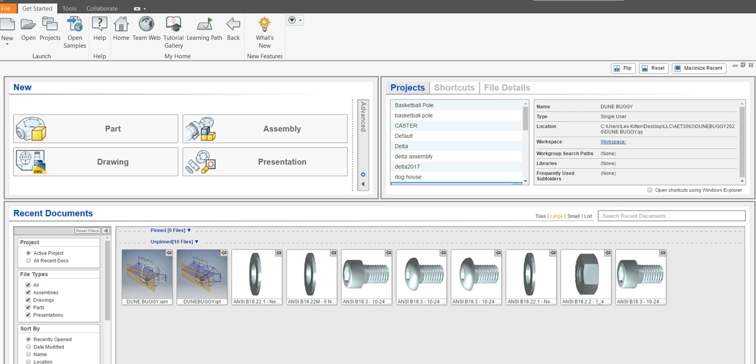Okay, today basically we're going to make a basketball frame and rim. So the frame needs to look like this. I did add a couple things to it since I originally did this drawing. You do need to put a 1/2-inch piece of polycarbonate, smoked polycarbonate, on the front of it like you typically see on a basketball rim.

You do need to put some holes in the bottom plate, 1 inch by 1 inch from the corner, 1 inch diameter, and put 4 bolts in it, so like you'd bolt it to a piece of concrete. Okay, so those are kind of the additions, and they're listed in the instructions.

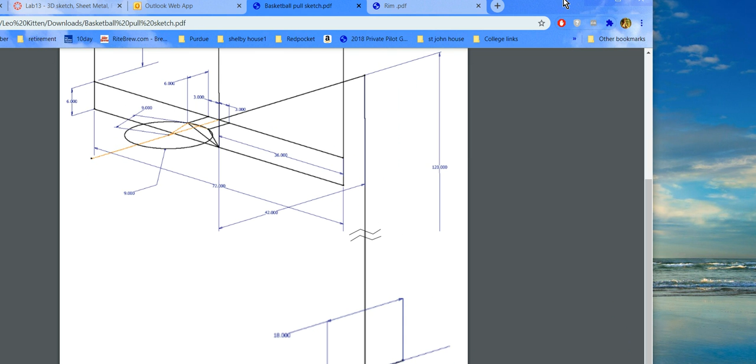Alright, so there's a sketch that basically goes into how to draw this. Okay, so we're going to do it in 3D. It's a little different than what we've seen before probably. Can't hardly see that. Okay, so it's 18 inches long, and we'll be centered on that. The bottom plate is 18 inches long.

Alright, so the first thing we need to do is make a project. So if we go into new from the file menu and pick projects and pick new again. Next, let's call it basketball pole, I guess. Make sure you're saving it wherever you want to save it. Your U drive or

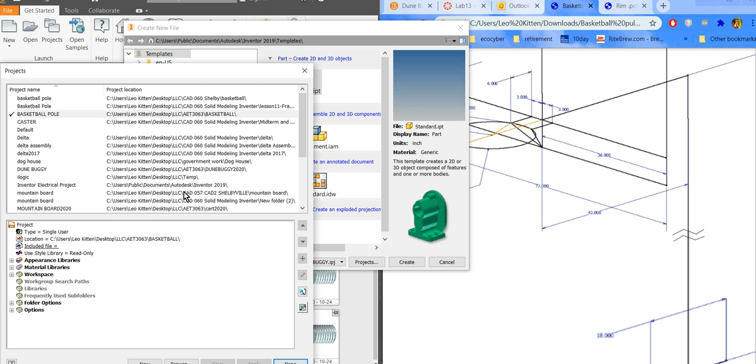Okay, and then finish. Once you pick the folder, finish it. It'll automatically save everything there. Okay, now the next thing we want to do is, we're going to create a standard part with a 3D sketch in it like this, okay? And I think it's all one 3D sketch, so it's definitely a lot simpler than the dune buggy we did. But it'll be some good practice on Inventor.

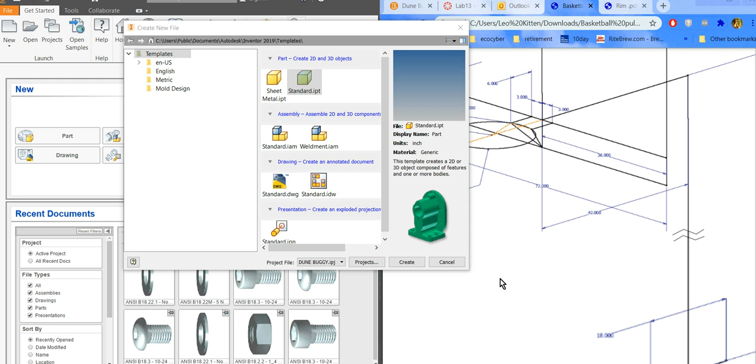And then we want to make sure we put it into a weldment assembly this time, not a standard assembly, okay? So it's a little bit different there. Alright, so go ahead and pick standard part first of all. And we're going to go right into a 3D sketch and basically sketch this whole plot.

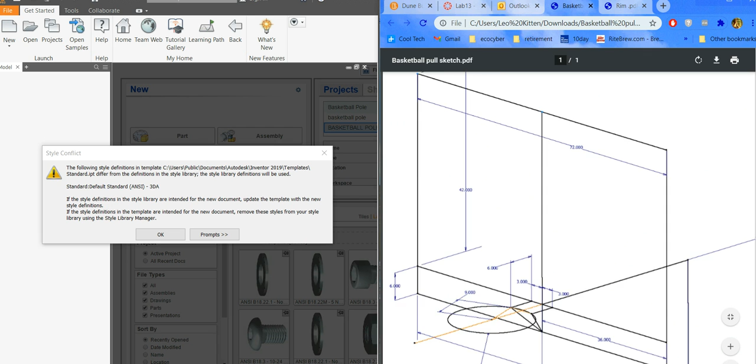Now you got to be really careful that you're going in the correct axis. I know it's kind of hard to see this, but hopefully you can kind of see the outline of all these tubes. I'm going to do it in front of you so we can do it together. Alright, so we start a 3D sketch, okay, and just pick a regular old line, and I'm going to go to more of a top front right view, okay.

Now notice all 3 axes. We're going to start off at the origin, and we're going to go straight back along the, notice the blue Z axis. We're going to go straight back along the Z axis 18 inches. Okay, so I'm moving in the Z direction, and I'm going to type 18 and then enter. Okay, now that gives me an 18-inch long line.

I'm basically going to hit escape to get out of that one, alright, because I want to draw right in the middle of that line, straight up. So I go back and pick line again after I hit escape, and I find the midpoint of that line. There it is right there. Make sure you get on it or it won't be locked down. It's not going to be locked down very well on this one anyway.

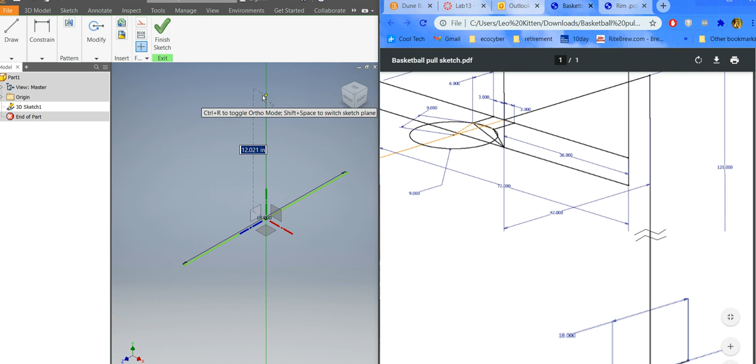And this one, the height is 120, 10-foot tall rim, right? So go straight up from the midpoint of that first line you drew, type in 120. I got off the screen, so I'm going to have to do it again. Straight up 120.

Okay, now it gets a little bit tricky. So we're right here. We're going to go straight out on the rim. It looks like 42 inches. So that would again be in the Z, okay, towards you, 42 inches. Okay, so we're drawing this line right here. All right, now you kind of need to just trace around the backboard.

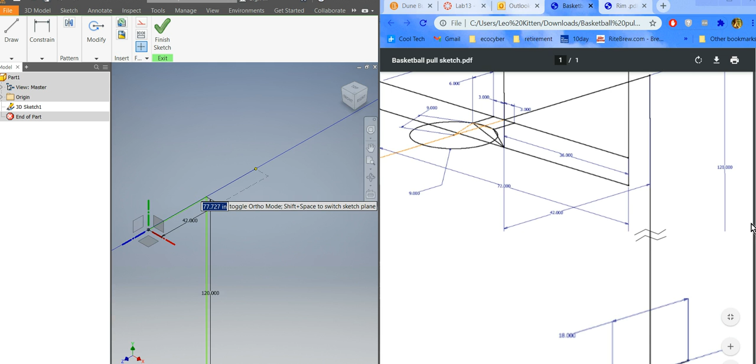So basically we're right here on this point. We're going to go over 36, and we're going to go up 42, back 72, and then back down and close it off. And then we'll just add all these other lines and circles. Okay, so I'm right here at 42 out. I'm going to go back this way at 36, if it'll let me.

I gotta quit switching screens. It always knocks me out of it when I do that. I don't know if I was on it. You gotta be real careful and make sure you actually are on the correct position. It looked like I picked the wrong position there a little bit ago. Knocked it out of whack.

So 36, and then straight up 42. And then straight over on the x-axis 72, and straight down again 42. So we're drawing the backboard at this point, and then back to where we started. Make sure you get on the green dot when you do it.

Okay. Now next one I'd probably do is just draw the bottom part of that backboard. So it drops down 6, goes over 72, and then back up.

So it doesn't matter which side you really start at. I'm starting right here. Go straight down 6, and over 72, and back up 6. So this 3D sketch works really good, especially when you're just doing nice square items like this. Okay.

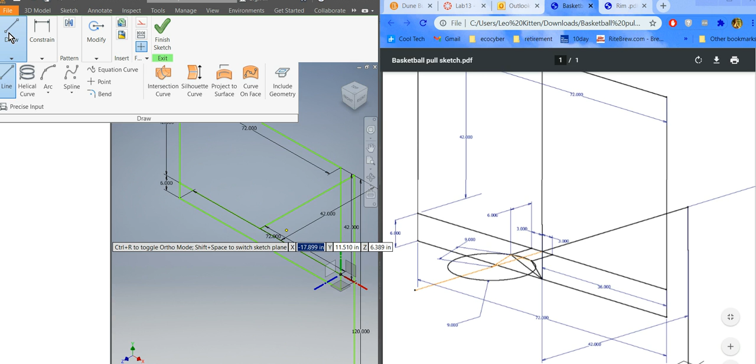There is a bar right in the middle, looks like, so we got to add that stick right in the middle all the way down. I'm going to pick on the midpoint of this one. I'm going to go all the way to the top. Sure I'm in the midpoint of it. Okay. Okay, so this is the basis of the whole basketball pole. It doesn't have the rim.

At this point, it'd probably be a good idea to go ahead and lock all those so they can't move on you, because they're probably going to want to move. So I'm just going to window all them and then lock them, because I know they're all correct. Okay, so I fully locked them down now by using the lock constraint. Okay, so I windowed them all and then hit the lock to lock them down.

Okay, now we got to work on the rim. The rim's a little bit tricky. So the first thing I'm going to do is basically create these braces. Okay, so it looks like they're 3 inches away from the middle. So I'm just going to freehand it in there and then add the 3-inch dimension. Okay. Probably do one thing at a time so it doesn't get completely out of whack.

So draw a line and just make sure you're on this line somewhere. It doesn't matter where. And then the Z again, go out. Looks like it goes out 6. Okay. And I'm going to tell it that that line is 3 inches from this line. Let's see if it'll work. Hopefully. Dimension it from this line to this point. It'll let me. Doesn't want to let me, of course.

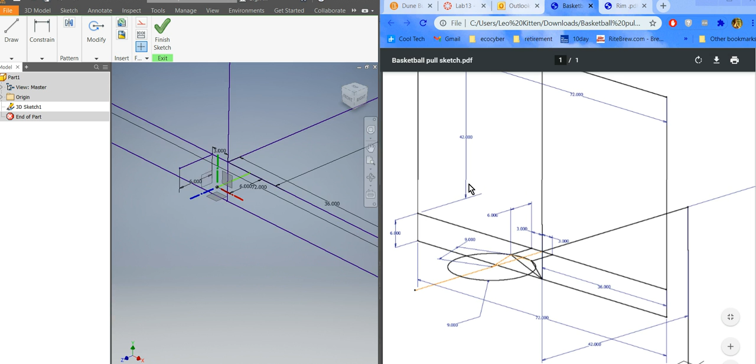Draw a line over there and then dimension it at 3. Make sure it's on that line itself. Go the right direction until it's 6 long. Throw a dimension across there, 3. Point to point. Usually we don't do point to point, but 3D it's making you do it. Okay, those are both locked down, so that's good.

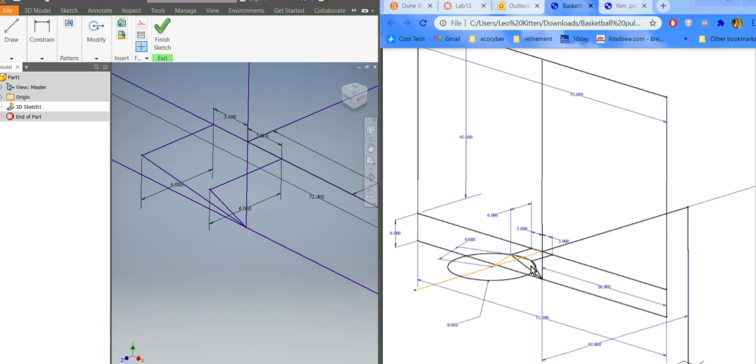Now we want to draw a diagonal down to that base. Okay, so again, draw two lines at a little bit of a diagonal from this one here down to the corner. Another one over here. Right back up to it, I guess. Okay. Now the rim's always difficult.

So I'm going to read the instructions to make sure I don't run into 10,000 kinds of trouble here. Okay, so we're going to have to do all this stuff. So we're going to use arc center point after we do our construction lines. Okay, so the construction lines, it looks like it goes from here out. Total distance, it's got a 9-inch radius. And this goes to the center.

How do I get that drawn to the center? Is there any other dimension I have on there? 9-inch radius on the rim. Okay, there's no line. There is a line across there, a diagonal. Alright, so I'm going to pick line. And I think there's a construction line. Yeah, I'm going to turn the construction line on.

Okay. And I'm going to go basically just a line out here as far as I can. Okay. Or a little bit extra. On construction, yeah. So from the center point here, I'm going to draw this real long one here, just extra long. Okay. Right in the middle. And that'll give me a line, a place to put my center point on. That's the only reason I'm doing that. So it doesn't really have a distance. So I just drew it out there wherever.

Okay. And now I'm going to draw another line from the angle brace point to that line, and I'll tell it that it's 9. Okay. Now basically give me a place to put my circle. So that's just a construction line. So from there to here, I'll snap to it if it lets me and type in 9. And it of course went too far, so I'm going to do undo and do it again. And I'll just tell it 9 after I put it in, maybe. Hopefully that'll work.

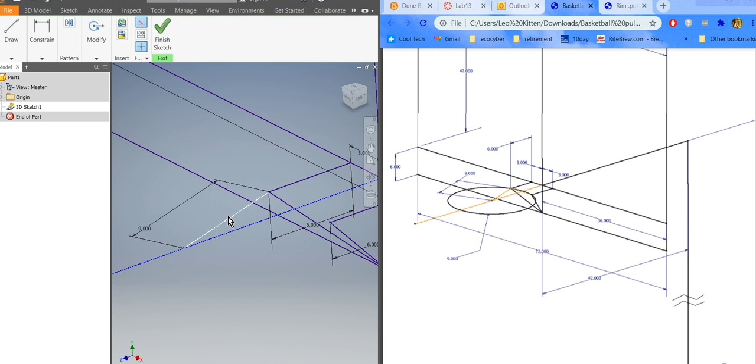Okay, so it says in the instructions, because I had a hard time when I first did this lab trying to get that darn circle to work, but it won't make a tube if it's perfectly round. It has to have a beginning and an end. Okay, so we want to use arc center with the construction lines and dims extended as we need to. All right, so we'll see if we can get that to work.

So draw. There's arc. 3-point, center point. Okay, so I'll pick the center point. Select the center. Alright, there's the center. And there's one point right here, and the other point would be right here. Okay, and now I'll see if I can extend that and later turn it. Yeah, I shouldn't have made a construction line. Go ahead and fix that right now. Touch it and touch the construction line, it goes away.

Now we're going to try to extend it. Hopefully it'll extend, and it's erroring out. Okay, so I probably have to delete a dimension or two for it to extend. Which one does it say? Delete the 6-inch dimension to let it extend, which is kind of crazy, but so I've deleted that, and let's try again. We'll add it back in later.

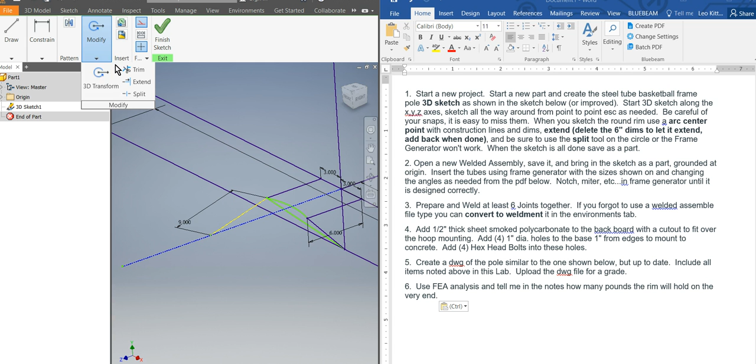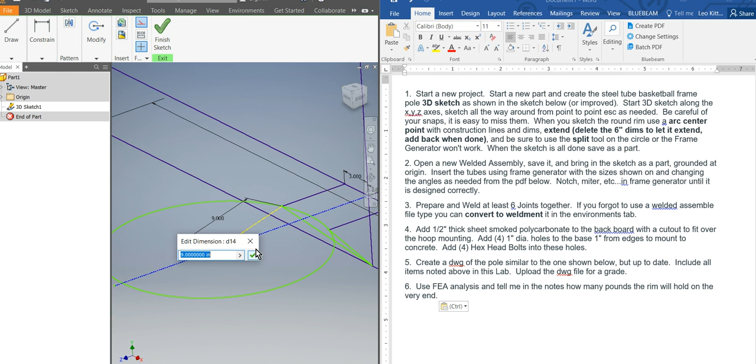Sometimes the programs don't always work. Maybe I have to delete the 9-inch one. Maybe that 3-inch. Yep, that worked. Okay, let me extend it now. I add all those dimensions back in. Looks like everything stayed where it belongs, so that's good. Okay. And I need the 6-inch dimension.

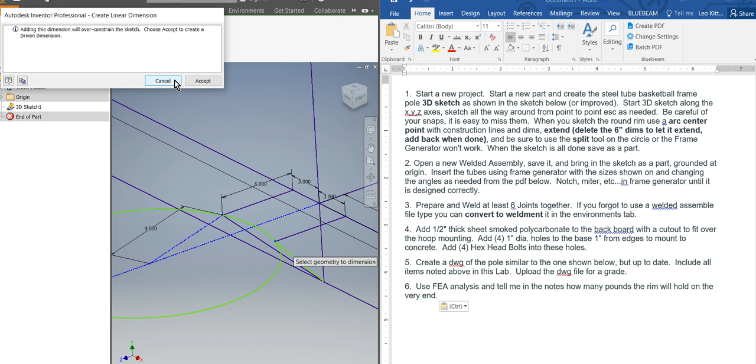Notice it doesn't always work perfect because this thing stayed purple even though I took a 6-inch dimension off of it, which you really wouldn't think it would have, but it did. So the 3D sketch isn't the most... says it doesn't need that one. Okay, so that's fine. Of course this line's not locked down anymore. I don't really know why. It says it can move, but it can't. I'm going to tell it that this line is on the z-axis and see if that does anything. Won't let me do that anyway.

At this point, all the dimensions and everything are right, so I'm going to go ahead and just pick those two and put a lock on them. Hold down the control key to pick more than one at a time. Usually I recommend not doing that, but in 3D sketches you don't have a lot of options. Okay, now it's fully locked. Everything looks right. I've got all my dimensions. I don't see anything sticking out or extended too far or trimmed off, which would be a problem.

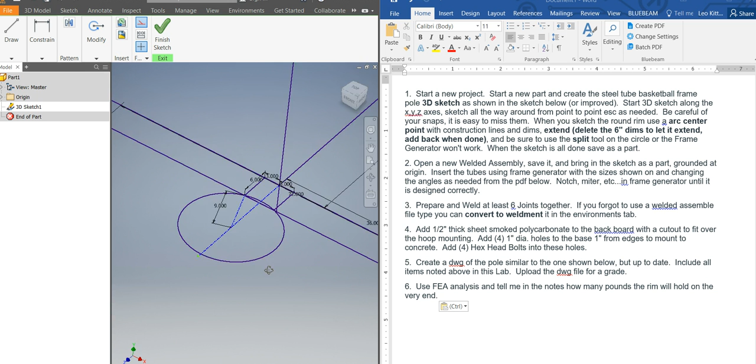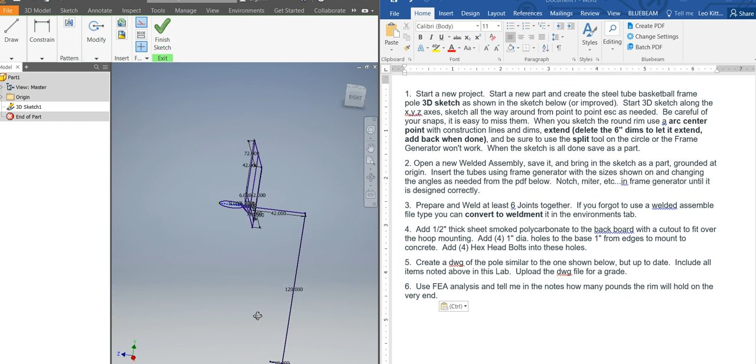Okay. So that's kind of what you're going for. So now you've got a good stick figure of the whole rim. Now this rim isn't like the dune buggy. It's basically going to have multiple kinds of metal in it, as we'll see here in a little bit. And then we'll modify some of the metals too as we go. Pretty simple one. Alright, so save it. Yeah, you gotta finish your sketch first, of course, and then save it. And just call it basketball pole or something like that.

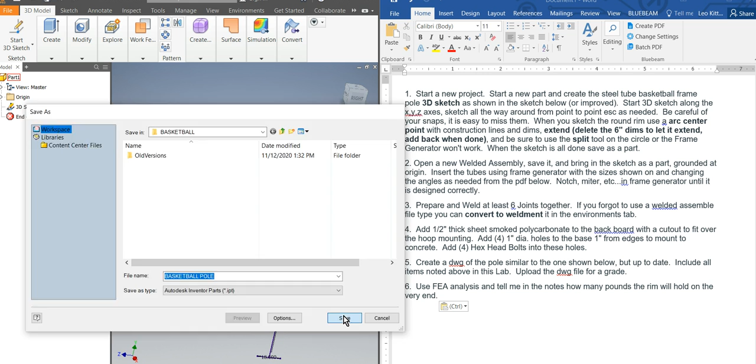Alright, so bring that into your weldment assembly. So file, new. You gotta pick on the first new so you can actually get to see the weldment assembly, and then pick out weldment IAM. Make sure you pick the weldment one. Create. Okay, this is basically the same as a regular one, except you can notice you got a weld tab now with a bunch of things you can do right there. I think everything else is still exactly the same though.

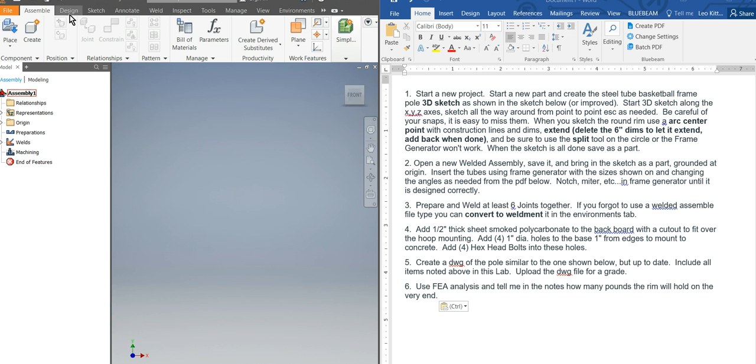Okay, so to begin with, we're going to make all those tubes and all that. So go back to the assembly tab and pick place. Hopefully it'll bring up that. It did. Open it, make sure you right click and drop it at the origin. Place grounded at origin. We just want one of them, of course. Okay, so now I think the rest of it's pretty easy. I think I've got it pretty much memorized.

We're basically going to put all the metal in there, and we'll put some polycarbonate on for the back side of it. Add that in there, and then we'll drill some holes in it. So this should give you some pretty good practice at Inventor. That's part of the other thing, not just the weldment. So it'd be something similar to a slimmed down version of a final project.

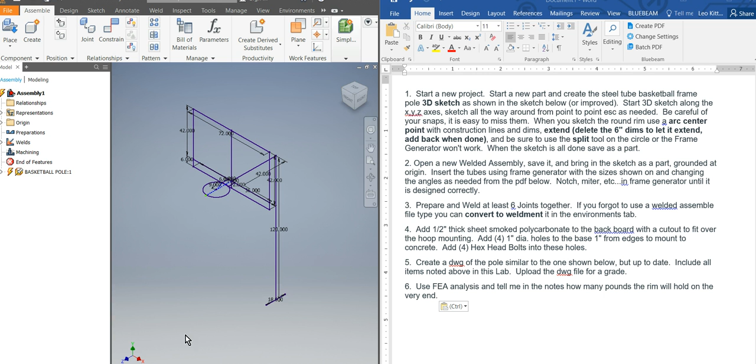Okay, so we've got all that done. Now from here, on the bill of material it's going to tell you what kind of metal to use. So we'll start off with the easy one. Number 12 here says it's basically 12 by 1, 18 inches long. 12 by 1 is a piece of flat bar steel that you just buy from any kind of metal shop. O'Neill Steel or Ryerson, anybody.

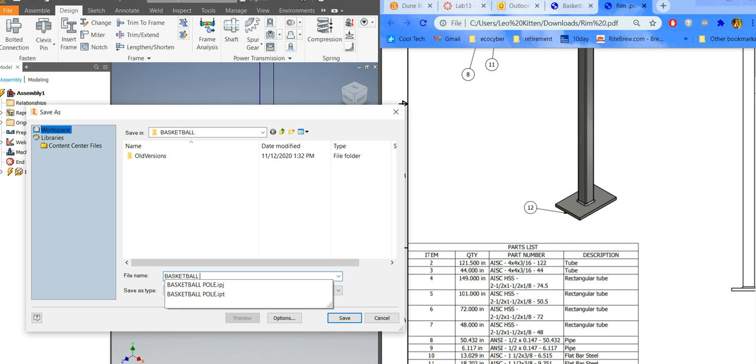So we're going to start off with that one, and we go back to the design tab and pick the insert frame tool button. Okay, it says we need to save it first. Do you want to save it? You bet. Basketball rim all over again, or basketball pole. Okay, once again, insert frame, or maybe it'll bring it up. It did. I think we just pick lines again. You might have to spin it. We'll see how it shows up.

I think it's standard AISC. Family is AISC. Drop it down, and we want flat steel. Rectangular tube. Flat bar steel, third one down. That's square. We don't want square. Top one. First one's rectangular flat bar steel. That is what we want. And then the size, the very biggest one they'll let you put in here is the one we're going to use. There it goes. So scroll all the way down, and 12 by 1.

Which you can buy that, and it's hard to unload though. I actually helped unload some metal that big before at my previous job.

Alright, now pick the 18-inch long one, and lo and behold, it's going the wrong direction. So don't hit OK yet. Now we've got to spin it. Which one of these angles do we use? Probably the only one that says degrees on it, right? Put 90 on there. And pick another bar. There, it went perfect. So it was 90. It is centered on everything, so we don't have to do any of that. This thing is made out of all mild steel, so we don't have to change that. So just hit apply.

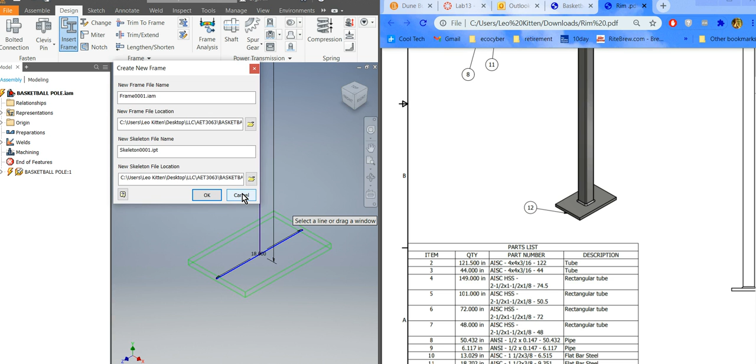I don't think I should have hit apply. Cancel. Do it again. Okay, so pick on there, because we don't want to hit apply till after we pick all of them. Maybe you do have to hit apply since it's different metal. Otherwise, it's going to try to make them all the same. Yeah, we do have to hit apply. It's been a while, right? So hit OK after you hit apply. Alright, so it'll generate that first one. It brings it back up. Now we're ready to do the next one.

So I think all these big ones are 4x4 tubes from memory. Yeah, 4x4 by 3/16. Pretty standard stuff. The two top ones are 4x4 by 3/16. If you work ahead, make sure you miter these with a little gap in it, because you've got to put a groove weld in one of them. So this one would be a true place to put a groove weld.

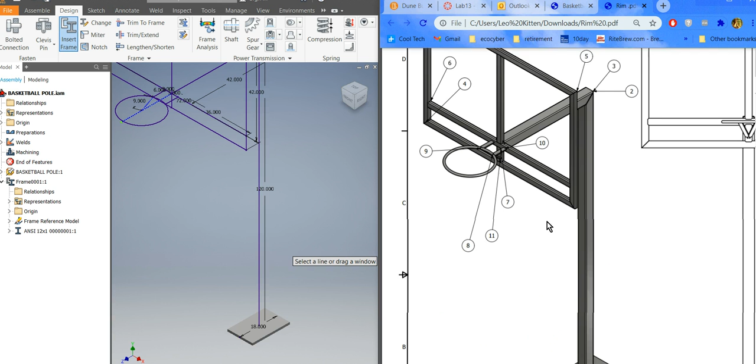All these I think are 1x2s, right? No, they're 2.5 by 1.5 by 1/8. So those are the rectangular ones. And then these little ones are flat iron, 1.5 by 3/8, and the round tube for the rim. I'm trying to memorize all these right now. The pipe is a 1/2-inch pipe, 0.147 wall. Okay, so the first two big ones.

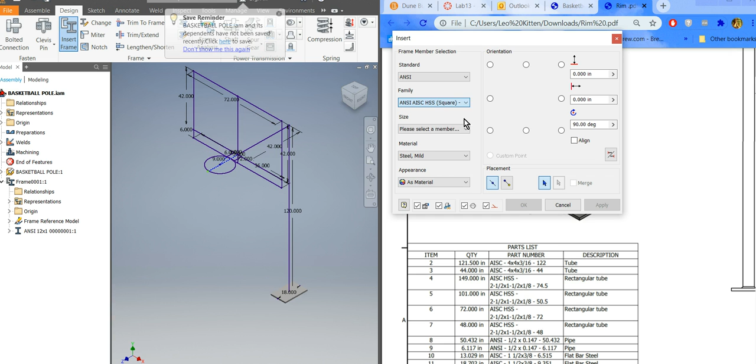We'll pick this one. Oh, we change the metal first. Be a good idea. So drop the ANSI down. Find square tubing, about the 6th one down. And then we want 4x4, 3/16 wall. Scroll down until you find 4x4, 3/16. Pretty heavy basketball rim, 1/8 of an inch probably would have been plenty, but that day I decided it was that.

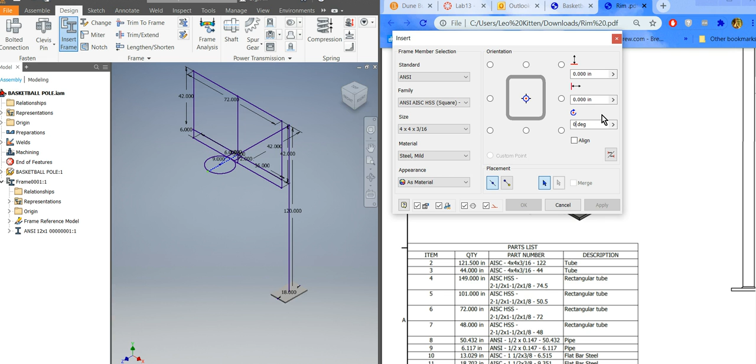I'd go ahead and turn that 90 degrees back to 0 until we need it to be 90. It's square, it really isn't going to make any difference, but get it back to default. So you pick on that tube, pick on this tube. And they look pretty good. Nothing fancy there. Just hit apply and OK.

Okay, so now we're going to do all these. I think they're, what are they? 1.5 by 2.5, or are they 1.25? 2.5 by 1.5 by 1/8 wall. Okay, so we got to do all them, and notice which way they're facing. So if you get one that's flipped, you're going to have to do 90 degrees on it. All right. So make sure, notice how they're facing flat, so you could bolt a piece of plexiglass to it, or acrylic. Okay.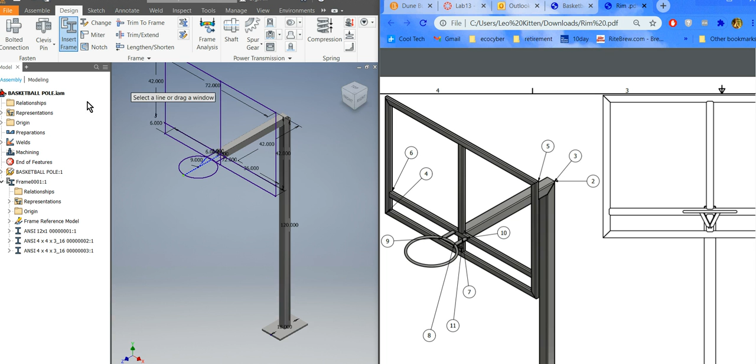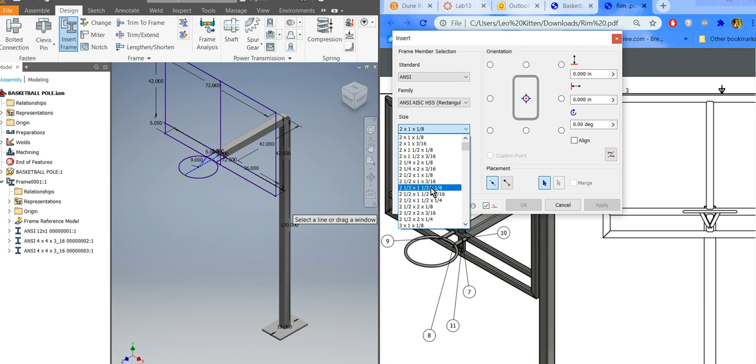So I'm going to go over here and switch my metal over to 1.5 by 2.5. I probably got to get out of square and go to rectangle. Rectangular tube. Now I should have somewhere in here 2.5 by 1.5. There it is. That's way too thick. There's 1/8. Okay, 2.5 by 1.5, 1/8 wall. And pick the first one and see if it's the right direction. And it is. Yay. Okay, then I'm gonna keep picking.

And I got lucky. All mine are the correct direction. I think. Yes, they are. So if they weren't, you'd have to change the angle. Another good reason to go back to default. Okay, hit apply. Hit OK. Just generate all them.

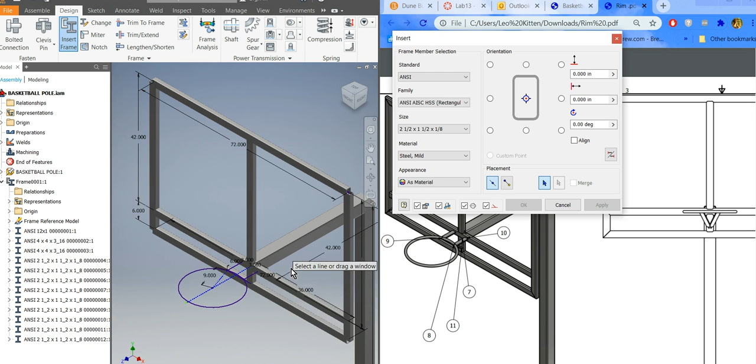Okay, now we're going to make the flat irons, which are these 4. You can see them. All right. Okay, so we change it back to flat iron, which is the first one. And it's 3/8 by 1.5 is the size. 3/8 is, where is 3/8? It's probably 1.5 by 3/8, knowing this crazy thing. Okay, so let's find 1.5. There's 1.5, yes. There's 1.5 by 3/8. Okay, so usually it says 3/8 first, but not on this one. So 1.5 by 3/8. It is regular old steel.

So I'd put these two in first, and notice they're way off their own direction. So let's see here. There's an align button here. I'm going to pick align. And now it's looking for something to align to. So I'm going to pick this line right here. But it's aligned wrong, but it's close. So I'm going to say 90 degrees from that. And I got it to go flat. Okay, so I had to pick the align button, and I had to pick a line in the direction I wanted it to go, and then it was 90 degrees off, so I had to change it 90 degrees. And then I got what I wanted.

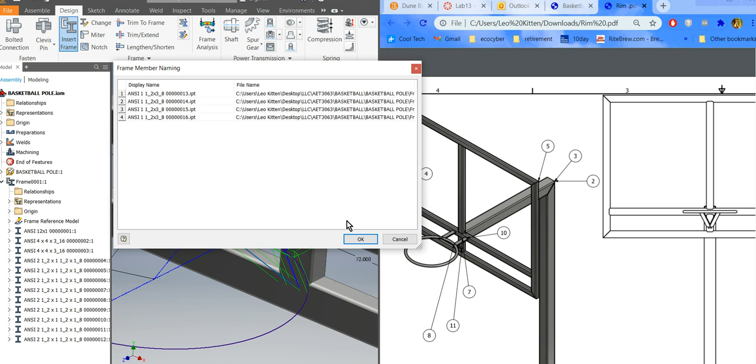And the last one we need to do is the actual tube. So I think it's just a pipe. Plain old pipe. And it was 1/2 inch by the thickest one they had, if I remember right, which is not very thick, but it's big enough to hold, I think, a regular person, believe it or not, when it's done. We'll find out.

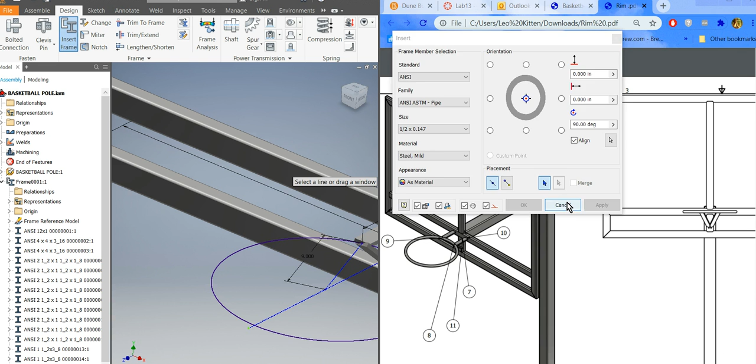Okay, we can't pick it. There was a note in the instructions saying you have to basically break this because it's a solid tube all the way around after I extended it. And of course, Inventor doesn't like that. So we're going to have to cancel out of this and go back into the sketch in the IPT and fix that and make it 2 pieces. If I would have just read my own instructions: be sure to use the split tool on a circle or the frame generator won't work, which it didn't.

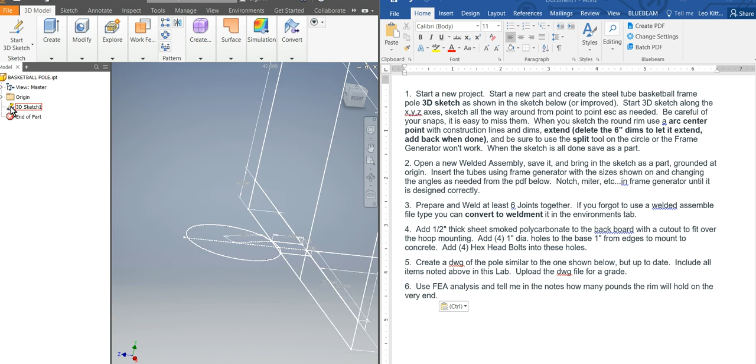Okay, so where's the split tool? We got to go back in that 3D sketch, so double click on the 3D sketch. Nice thing about a parametric program, you can always go back and fix it. There's modify, and there's the split tool right there. Splits curves into 2 or more entities. Okay, select the curve. Got that. Select the portion of the curve to split. Well, I only picked half of it, which I don't really like, but okay, so it's going to split right there, which I like.

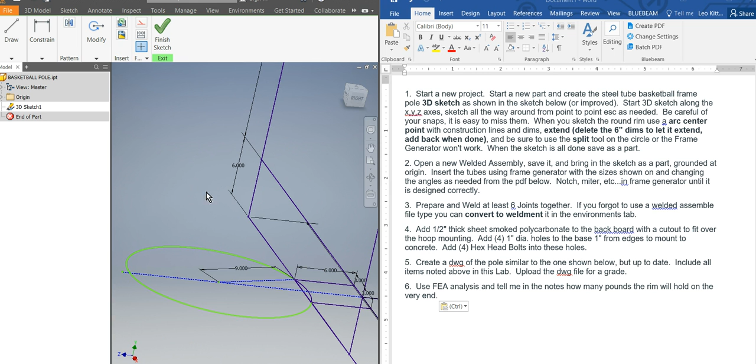The whole front of it's one piece. So I picked those 2 halves. I'm leaving this part off of it. So that'll be its own little piece, and this will be all one piece. Hopefully that'll make it a little stronger. Okay, I got that done, and then I right-click and hit OK. And I'm going to lock this down. So, well, did it actually split it in half? It split it in half.

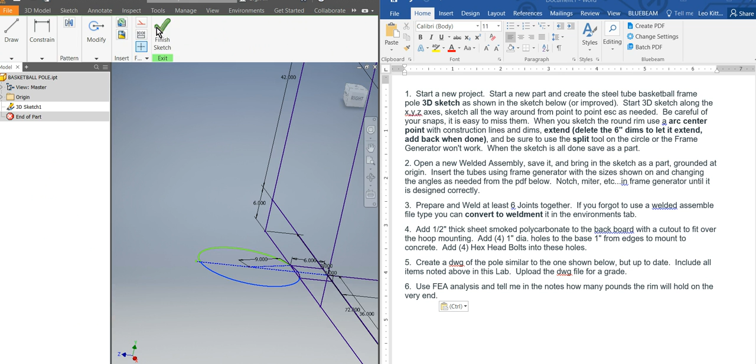Be nice if I could join that, but I'm not sure why it split it right there, but we're just going to deal with it. So we're going to have a couple pieces there, but I think there might be a way to join it. I'll see if I can figure it out when we get into the assembly. Okay, back in the basketball pole. Guess you got to save that. So finish sketch, save it. Back into your assembly.

Looks like it might be one piece in there. Alright, insert frame. Hopefully it'll bring up the same one we had a while ago. It did. Now I pick on it, and I pick on this one. I think there might be a way to join those 2 together. How do we do that? Alright, we have a merge button right there. So I'm going to pick all 3 of them and turn them back into one with a merge. Now they're all 3 one piece.

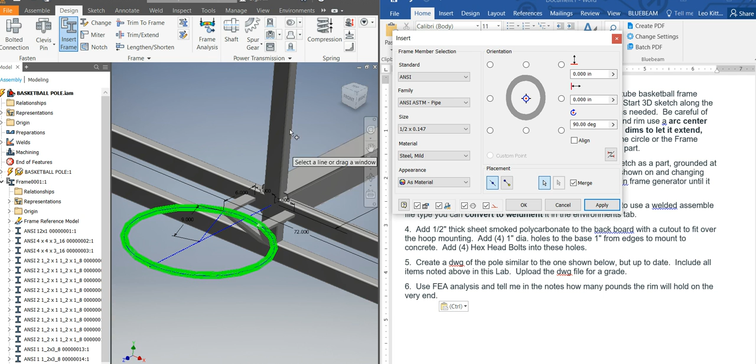I probably should have done the merge button actually on some of these tubes as well, like the ones going all the way up and so forth. So remember, there is a merge button there. Hit apply. Hit OK. Alright. So some of these on here, like I think I had 2 pieces here and here. This really should be one. Don't know if there's an easy way to fix that at this point. Probably should have merged them.

But I'm not going to make you redo it all because of that. But if you do a final project based on that, make sure you do merge any bars. It would be one piece. Don't have 2 separate ones like this. Okay. So that's basically the basketball rim. Now we basically need to do a miter and notching, and also put the holes down here. I'm not going to do that in a video. I'll get you started though. So you need 4 holes, 1 by 1 on this one. So it's a good place to probably save.

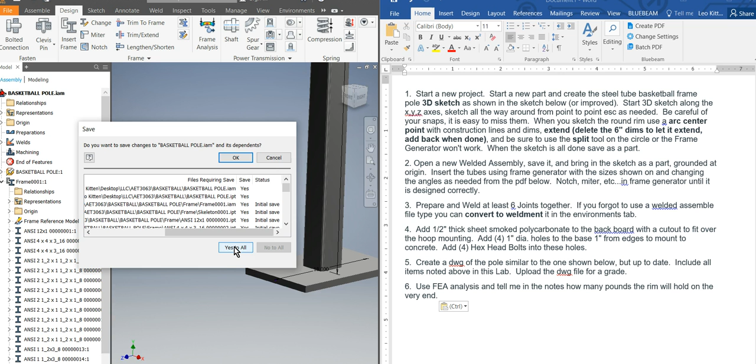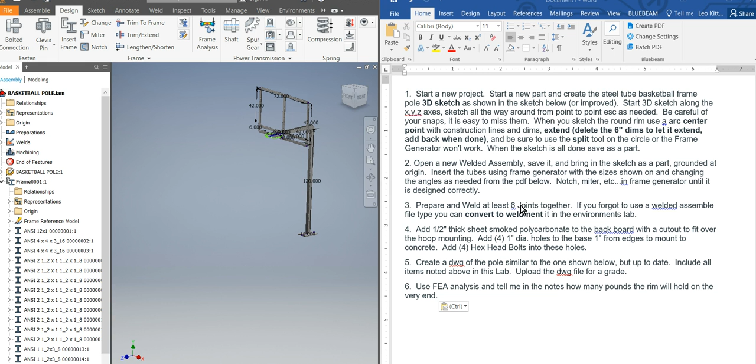Save that. Yep. I'm just going to show you the weld part, I guess. I'll do that first, and then you guys can go into doing it. So you have to have at least 6 welds, it says. I have to have a couple different kinds. Okay, you have to have a groove, and I don't say that in here. I'll update it. You have to have a groove and a fillet weld too. You can't just have all fillet welds because they're too easy. Okay, so these tubes are all going through each other, so you have to fix all that first.

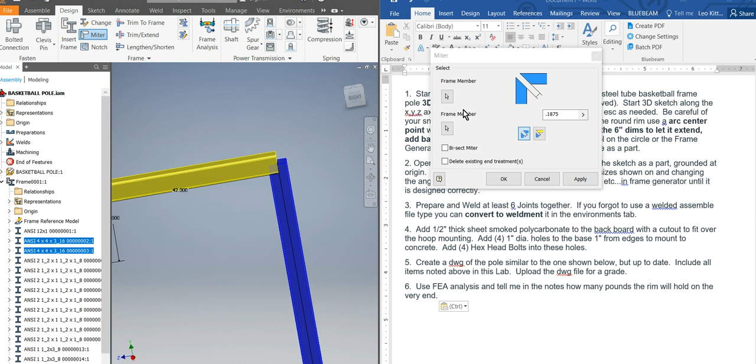So I'm going to miter those big 45s, and that's a good place to put a groove weld, because the groove basically needs a groove to go into. So these two I'm going to miter together, and I want a space behind them, like maybe 0.25. That's probably way too big. Let's go with 0.1875, 3/16. And I'm going to pick this tube and this tube, and then hit apply, and it should bind them together with a little gap, if I did it right. So if we spin it, see there's a gap in there, and you can fill that with a groove weld. Alright, so that could be your groove weld.

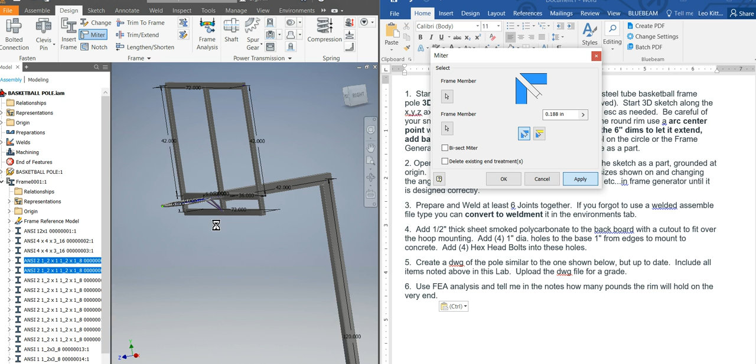Now all the other ones, you either miter or notch. All the way around this outside, you probably need to miter, and then the other ones you need to notch. Okay, so miter, and just go boom, boom, oops. I should have picked the bottom one. Miter, boom, boom, apply. And just keep doing that till you get all the way around it. So you miter the corners basically, right? And these are all going to have gaps, so you can basically fill all them with a groove weld. And if you do all 4 of them and that one, that's 5 right there. Then go ahead and do all your notching.

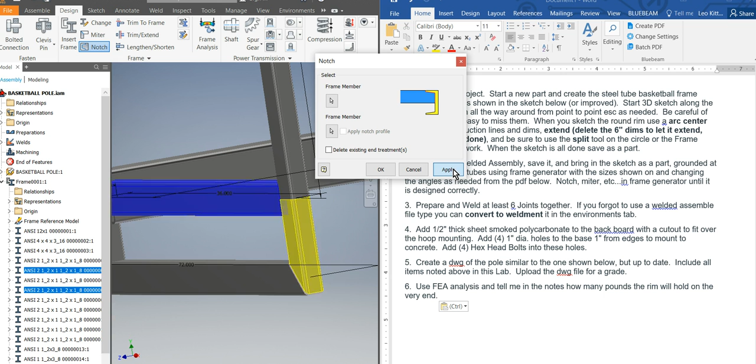So for example, a notch would be, this tube is going right into that one. See that? That's not possible. You got to cut it off. So I'm on the blue one. Blue gets cut by the yellow one, right? Yep. So I'd pick that for my blue, and for my yellow I pick this and that. I think I can hold down the control maybe and pick them both. No, it's not letting me. Newer version might. So I'm going to apply that, and then again do this one and that one, apply. Okay, so now this thing's cut from it.

So do all of them that need something like that. You can't have 2 bars going through each other. See how that bar is going through this one? So you got to do all that notching. All right. So I'm going to put a fillet weld down here. So I'm going to go ahead and do this one real quick, and then show you how to do some welds, and then you guys can come back and finish that up.

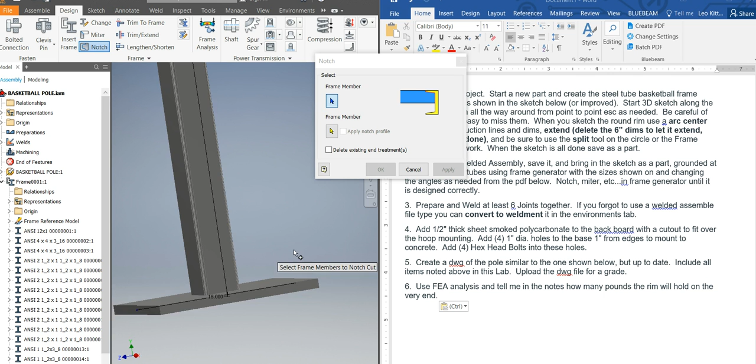So I'm going to notch this 4x4 tube with this flat iron, and apply. Okay, so they ain't going through it. Now I'm going to go ahead and show you how to do some welds real quick. You can finish up notching and mitering later. Okay, the welds are pretty easy, if I can remember how to do it, hopefully. So you go to the weld tab, and let's weld this whole bottom.

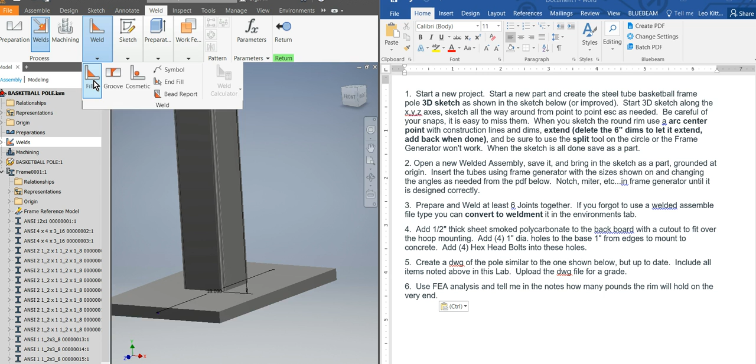Okay, so let's weld the bottom. So there's the welds, alright? So you got to pick weld first of all. Then it gives me my options. Alright, I'm going to do a fillet weld. Okay, now usually with the fillet weld, the main problem is if you do too big of one, it won't do it. So I'm going to do a 0.25 by 0.25, nice simple one. And if the weld doesn't fit, then of course it won't let you do it.

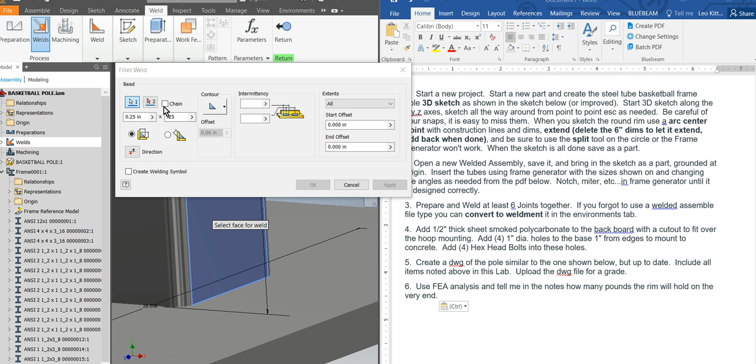And it says 1, okay, so I'm going to pick this face. And I think there's a way to chain them together. Yeah, so I hit chain, it chained them all the way around. Okay, and then for 2, I'll pick this face. And look at that, I'm going to get a nice weld. Now usually when it fails, you won't see a preview like that. So I'm pretty happy that it's actually going to work.

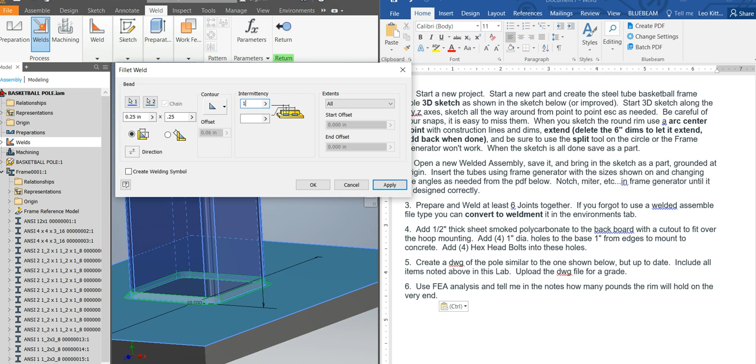You could do an intermittency. Okay, so I'm going to try a 1 and a 2 here. So now I've got a 1-inch weld every 2 inches, which is kind of cool, right? There's my distances. That's all good. I didn't want to do this distance. I wanted the X and the Y. Create weld symbol. You don't need to do that when you do your dimensions. Okay, hit apply.

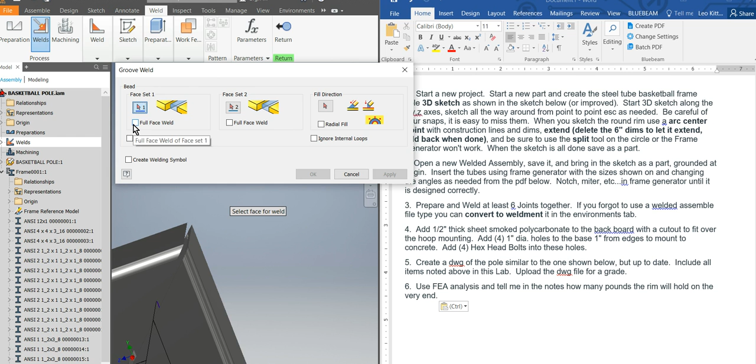And that one's done. Okay, now I'm going to go up here. You could do some more fillet welds at that point. But we're going to do this groove one, so you know how to do a groove one, if I can get it to work. Okay, so weld, groove. Now this one's a little trickier. I think you do need to hit full face and chain faces. Full face. And maybe the radial button, I really don't remember.

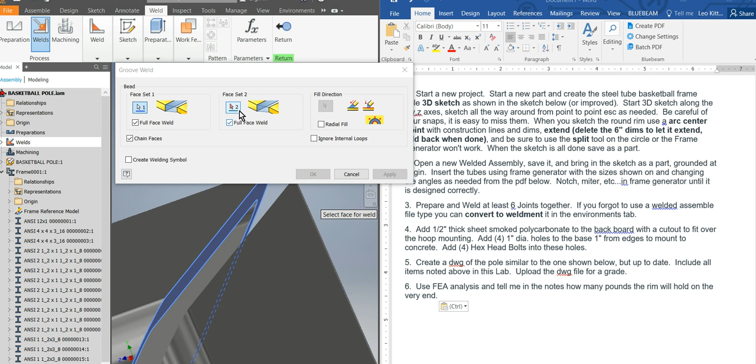So we're going to pick 1 here. And so you pick inside here, like there. And for number 2, of course, you pick the other one. That's going to hit that one. I got lucky. It looks like it's going to work first try. So I was thinking you had to pick radial fill, but evidently not. And now I'm going to hit OK. Okay, so we got our groove weld to work too.

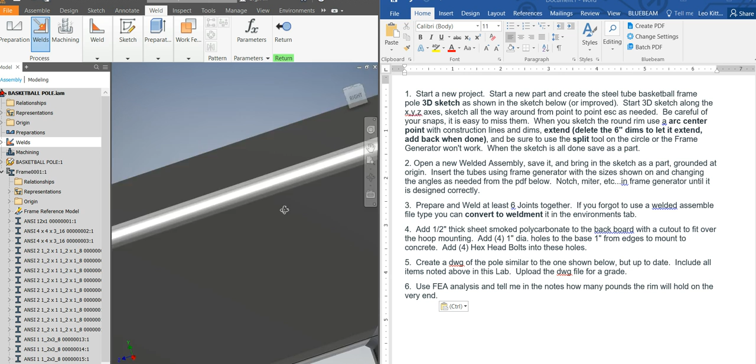So you got to do at least 6 of those welds. You really should probably do more of them. You got to miter and notch everything on this, and you got to put holes in the bottom of this. So I'm going to return back now and go back to the assembly. Okay, and to put the holes in this, you would double click on it like that. Now I'm in this part. Notice it says return at the top of my screen. So I'm in this part because I double clicked on it. Now I can do whatever I want with it.

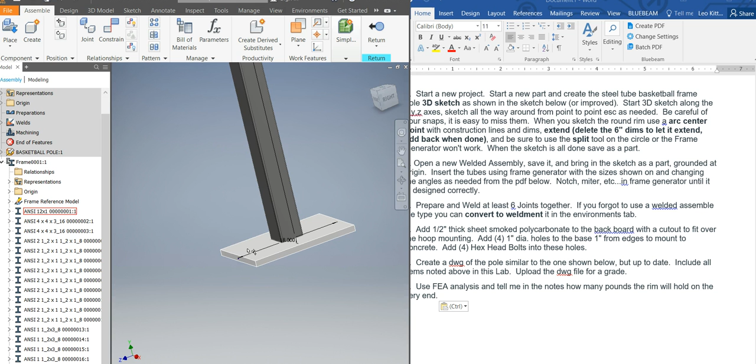I'm gonna right click on that. I guess I got to double click on it again. So I got into the frame generator, and I had to double click on it again to get in that part. Now I'll probably have to double return to get out of it. New sketch on the top of it. Drill my 4 holes into it, save it, and get back out of it.

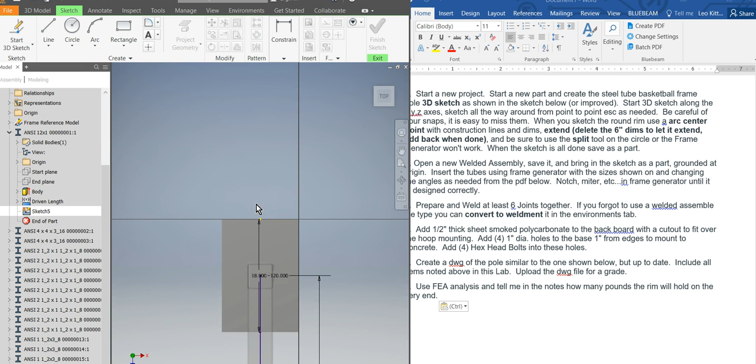So for instance, circle. Now I'm not going to put it in the right place. You need to put it in the right place. Okay. And fully constrain it. Finish sketch. Right click. Extrude. Cut. All. Okay. So that's how you put a hole in it. Save it. Return. Return again. Now we're back into the main assembly.

So you've got to do that. You've got to insert a bolt in there. So place from content center, bolts. You should all know how to do that by now. So make sure you put that in there. If you are using a server, remember a lot of times the bolts won't remember if you log back in later. So make sure you finish the drawing at the time that you put the bolts in, or you might have trouble with the bill of materials. Okay.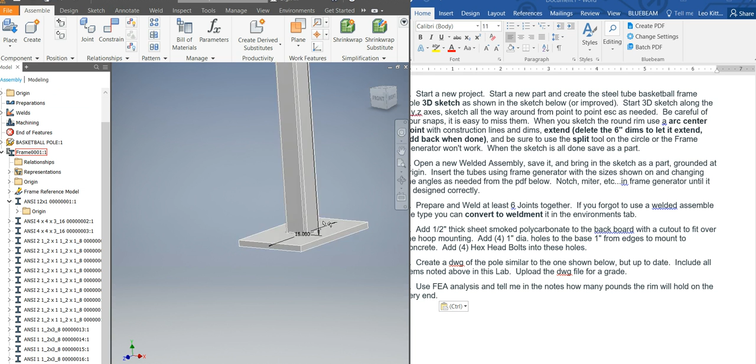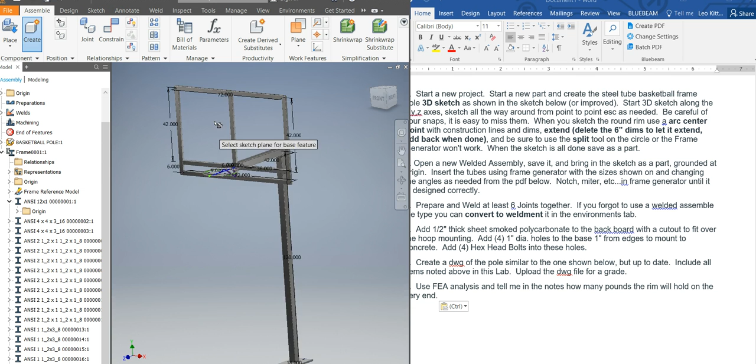I think we've got to do a backboard too, and then the FEA analysis too. Okay, so the backboard is basically hit create, just call it what it is, backboard. Hit OK, and it wants to know a face to put it on. So of course it's going to be right there on the front.

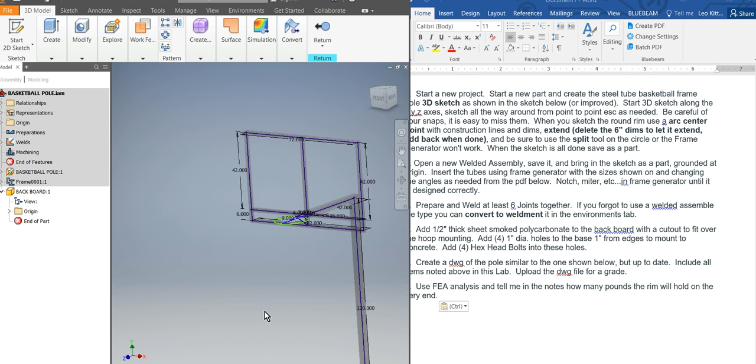FEA analysis. Okay, you've got to do FEA analysis on the front of that rim. So that would be environments. Oh, I've got to return first. I must be in something else. Environments. Save it probably. Mine's not going to be right because it's going to be weak, but I'll show you in the video at least. So we've got environments, stress analysis. How many pounds the rim will hold.

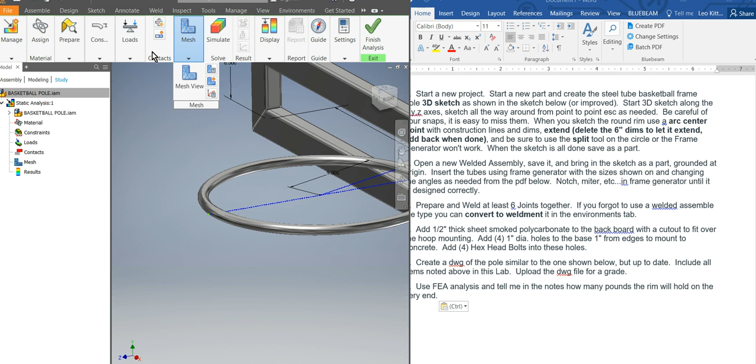Okay, so I'm going to create study. I'm going to say OK on the defaults. I'm going to lock the base down, so I'm going to constrain the base. This is going to be bolted solid and can't move, and hit OK. And I'm going to put a force on the front of it. So there's load, force. Make sure you expand it if it's not expanded.

Use vector directions because it's going to be straight down, which is the Y direction according to this. So I'm going to put 100 pounds on there and see what safety factor I got, and that'll tell me how much it holds. Probably a -100, right? It's going down. See if I can get right on the edge of that. I don't really like where that went. Cancel that. I'm getting 3 of them. Let's try again here. Force.

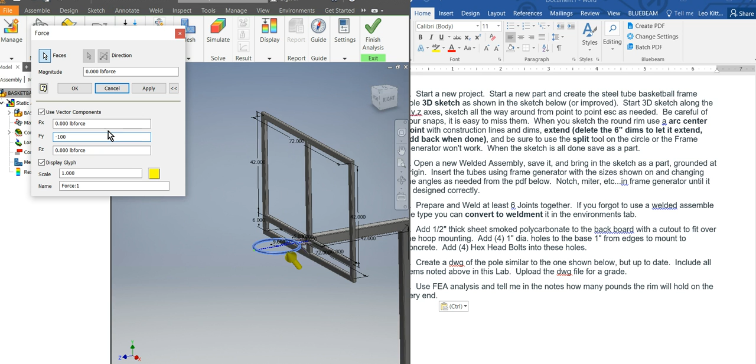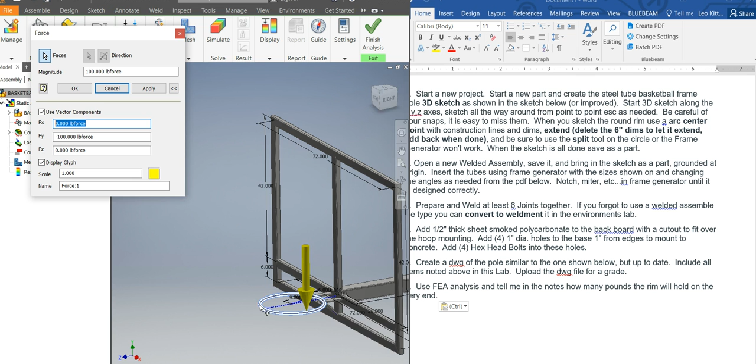It keeps putting it on that edge there. It is doing it across the whole thing though, it looks like. So I'd be okay with that, I guess. The only way to take care of that is you'd basically open this up and maybe put a little flat across the top of it and put it right on the front, which would represent somebody grabbing it and doing a slam dunk on the front. I'm not going to make you go through that, but that's how you would get around it. Put a little hole in there or put a flat on top of it, something for Inventor to grab.

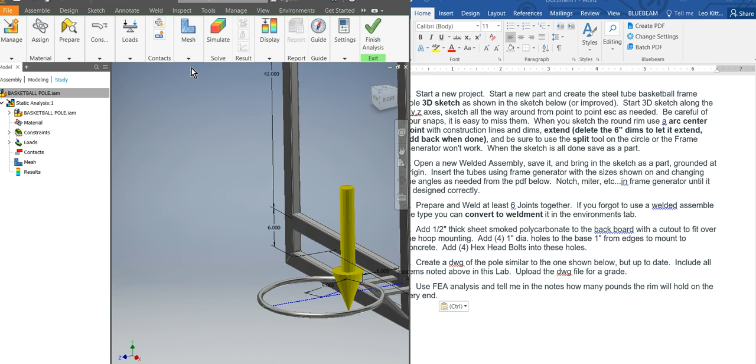Okay, so we hit OK here, and then you've got to hit simulate, run, and then you look at safety factor and multiply your safety factor by 100, and that tells you how much it holds. Make sure you do a full print with all the bill of materials and all the parts. And I think that was it.

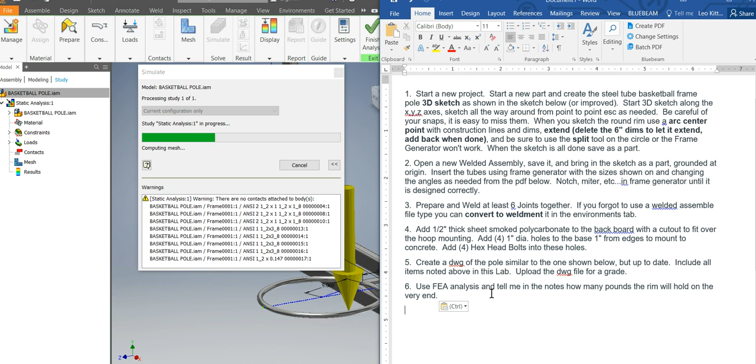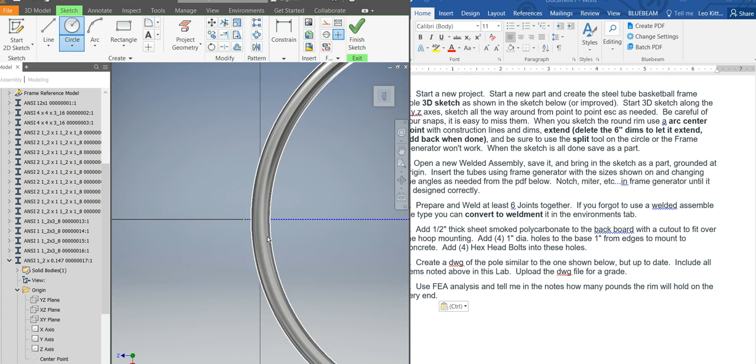Yep, that's everything. Okay, I got some crazy number on my FEA analysis, so I'm going to try to put a hole in this thing. So I double clicked on it and got into this part. Now I'm going to find a plane that dissects that, hopefully. There's one right there. New sketch on there from the origin. Now I'm going to draw a little circle right in the middle of that thing. It actually snapped to it, believe it or not. 0.25 circle.

Let's make it smaller than that, so it doesn't affect the analysis much. 0.0625, so a 16th. A little bitty hole in it. Finish sketch. Right click. Extrude. Cut. Both ways. All. Okay, now I should have a little bitty 16th hole in this thing. Save. Return. Return again. Go back to my

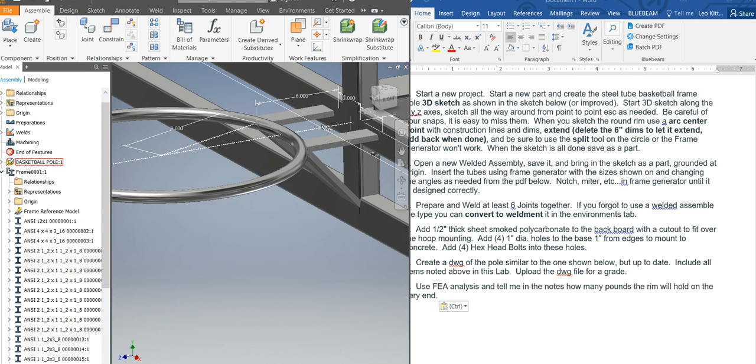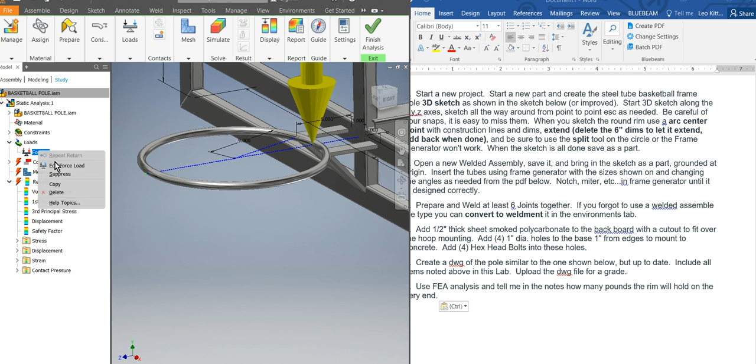it knows these two are assembled. It might not have realized these are together until I notched them. That might have been the problem too. So I'm going to run my analysis again and see what happens. Put it on that hole. I'm back in the stress analysis, and it moved it over here for some reason, but I'm going to go back into that force load, right click, edit force load, till it's right here.

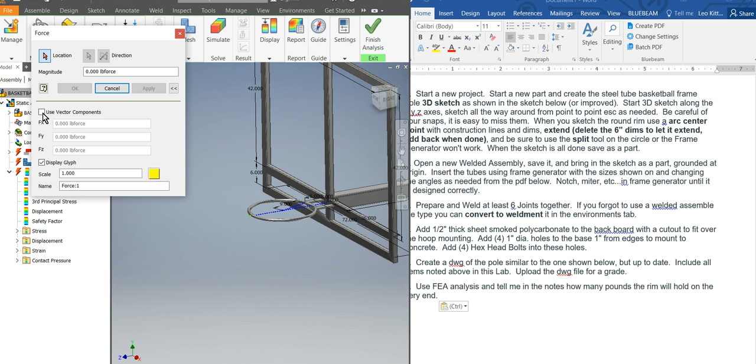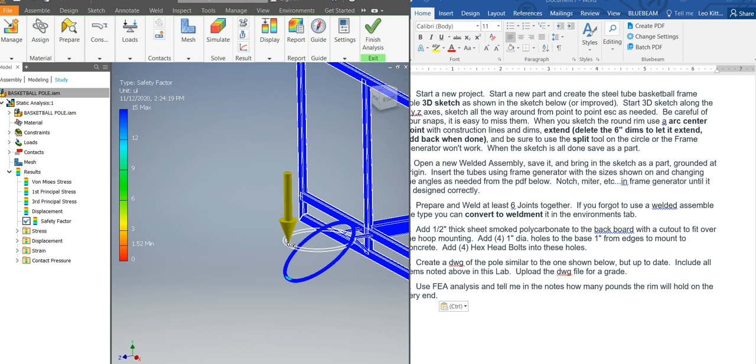It's probably easier to just delete it than try to edit it. Negative 100 in the Y. There, that looks a lot better. Hit apply. It did throw up a bunch of warnings, but on mine it ended up with about a 1.52 safety factor, so that'd be 152 pounds on the end it would hold. So it's actually stouter than you'd think. Yours should be similar to that, I think. Okay.